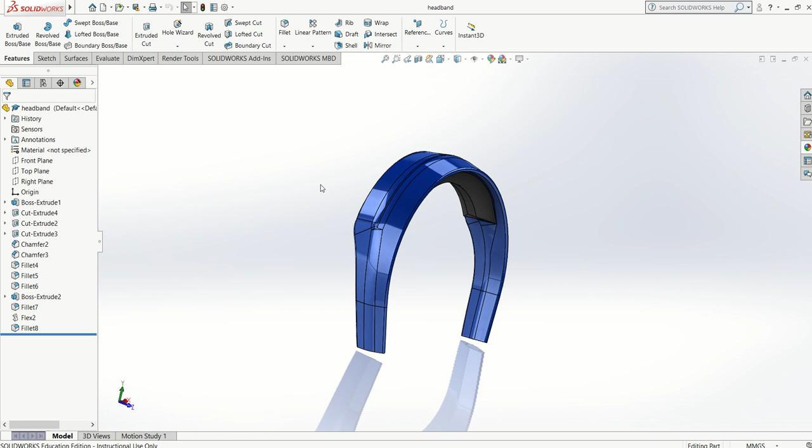So what I'm going to do is go up here to File, Make Assembly from Part. As you can see, these are my open documents here. So headband is what I want, so I'll just click the green tick and that'll drop into the center.

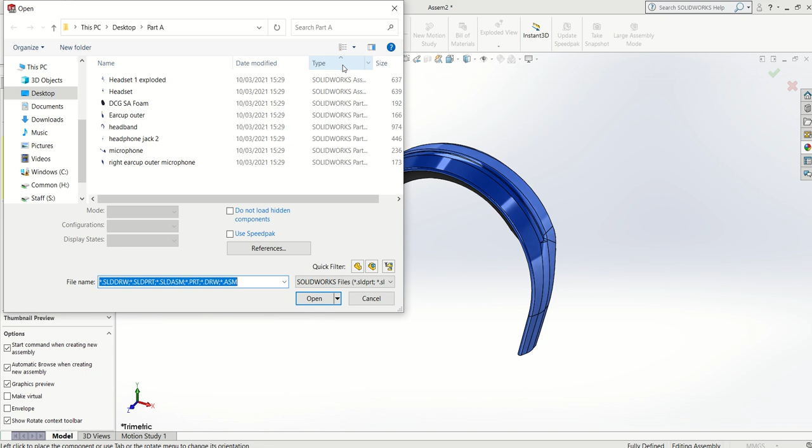Now I want to enter in some other components, so I go to Insert Component, Browse, and I have all of my part files here. So I will bring in the right ear, place it there. I can do it again.

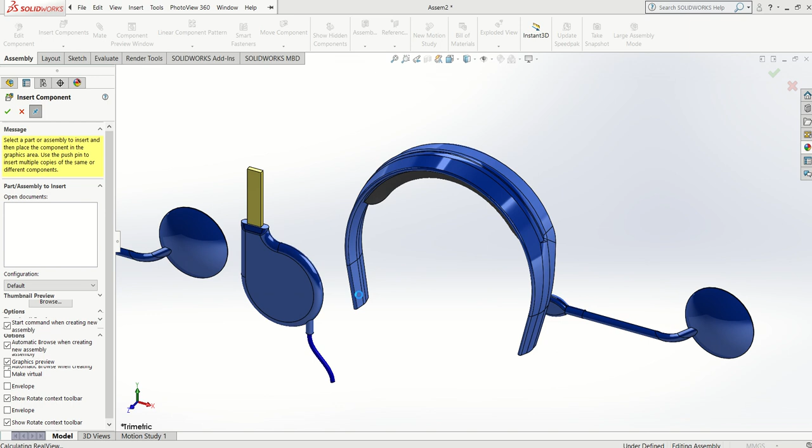Now if you don't want to keep hitting Insert Components, you can just pin that down there. Go to Browse, go to your next component, which is the microphone. Bring that in, browse, get the next bit, headphone jack. Okay, next component then would be the headband, which I already have, ear cup component.

And the DCG SA foam. Now I'm going to need two of them, so I'll click twice and I'm finished with all of them. So there they are, all of them.

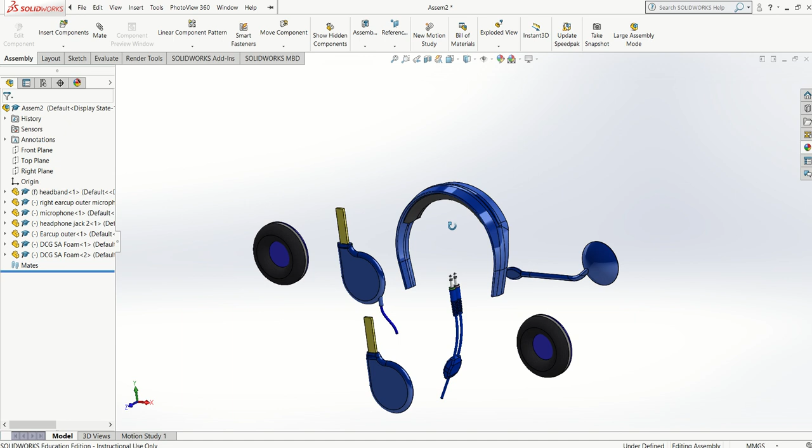Now what I'm going to do is I am going to connect them all together. So I'll go up here to Mate, and what I'll do is I'll start connecting them together. So I will select this surface here, and that surface is going to go on the left-hand side inside here.

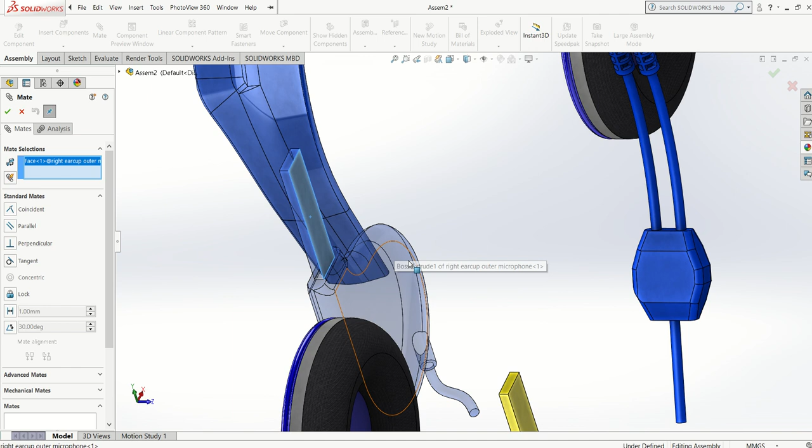Now I have to make sure that the orientation of it, that this bit that is sticking out here is towards the back end, which is here. So that means that that is going to go to the inside in there. So I'll select that surface there, and you can see that it's moved into position like so.

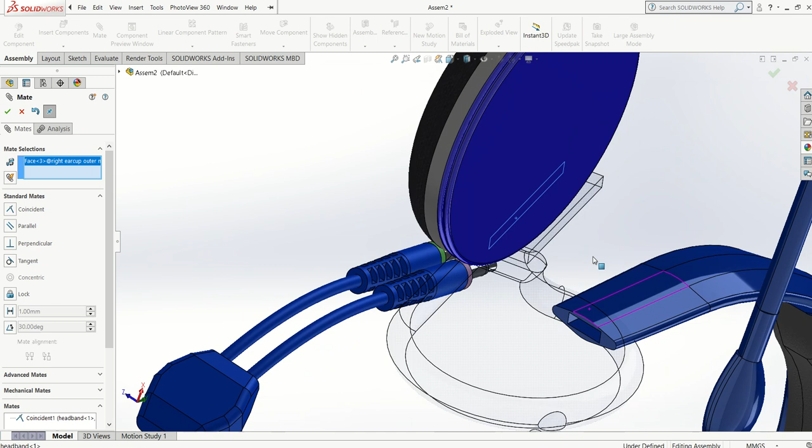Now the next area is going to be this surface. It's going to touch against that surface. Okay, so as you can see then that they have moved into position there. So I'll hit the green tick.

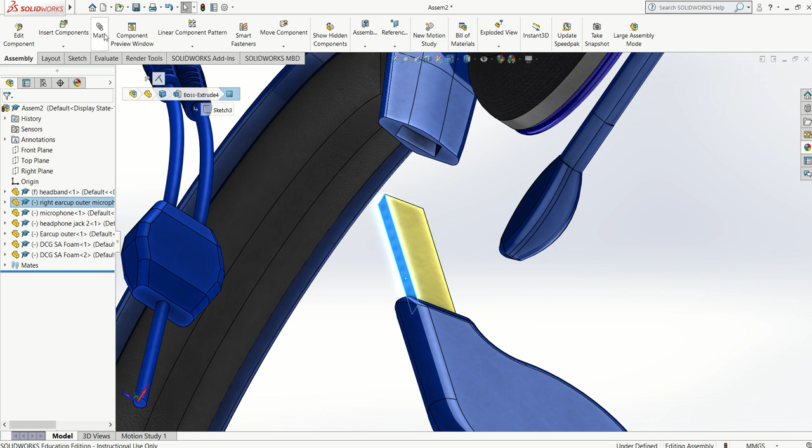If you select too many surfaces, obviously it's going to throw up an error. So we'll just do that again. So click that surface there, we'll click that surface there. I'm not in the mate, I need to be in the mate for this to happen. So select one surface and the other surface.

And now what we want to do for this headset is we want to limit it. Okay, so we want it to be a bit of a functional component, so we want it to insert in and out, but obviously we don't want it to go beyond like so, and we don't want it to come out like so. So what we're going to do is we're going to enter in an advanced mate into this.

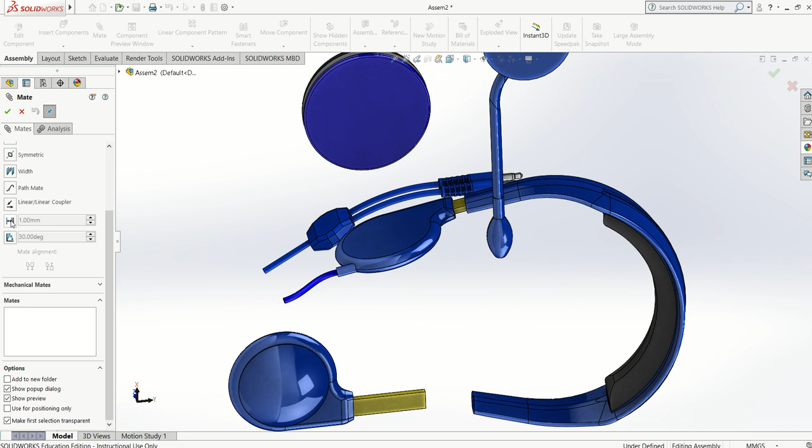So if I go here to mate and I open up the advanced section, this is my distance mate. Okay, so I can set a distance between certain surfaces, so that there, top surface, and that surface there. I could set to 0 if I wanted to do an ordinary mate, a standard mate, but I'm in advanced mates here.

So this is going to be my maximum component. So I'm going to just say 8mm is my maximum that I want to expand it, and I want it to be 0mm, which will be the two surfaces touching. So as you can see, if I hit the green tick now, that will go to 8mm and to 0.

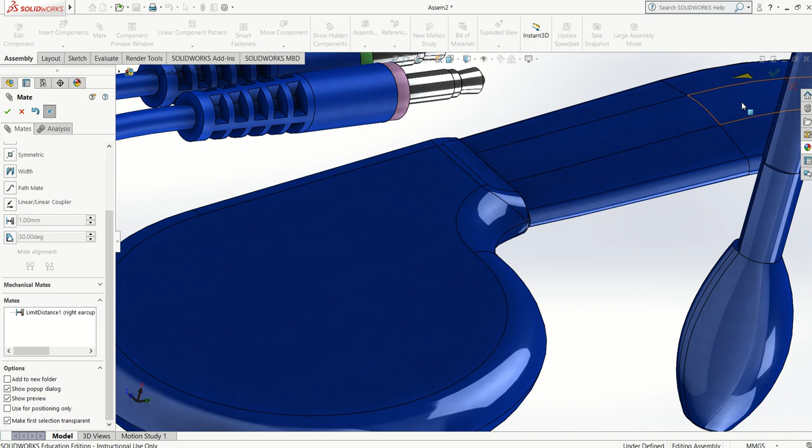Now if I notice if I go to 0, it's sticking up there a little bit, so I'm just going to open it up there and I'm going to edit that mate. So I'll go here to my limit distance, I'll right click, edit feature, and I'll change that to, instead I'll actually change that to 10 maybe, 12, and I'll change the minimum to 2.

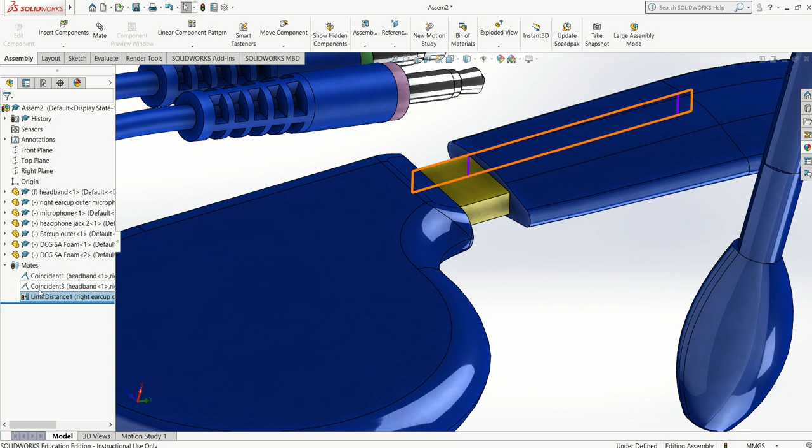Hit the green tick, hit it again, the rebuild button. So now there shouldn't be any issues. As you can see, there's a 2mm gap there, and then that's my 10 or 12mm gap there. Okay, so that's one component.

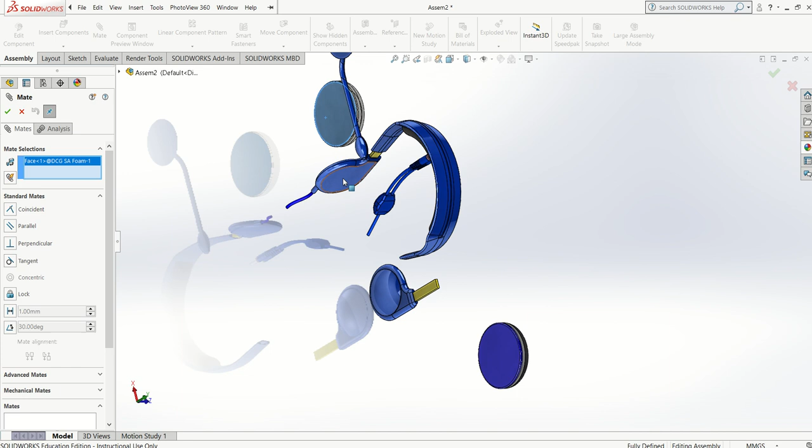The next then is I'm going to stick the padding to the inside. So I'm going to go to Mate, select the surface there and select that surface. Now, as you can see, the two surfaces are in conjunction with each other, but it's the wrong way around. I want the padding on this side. So what I can do is I can just go down here to Mate Alignment and hit the anti-aligned, and that will flip it around.

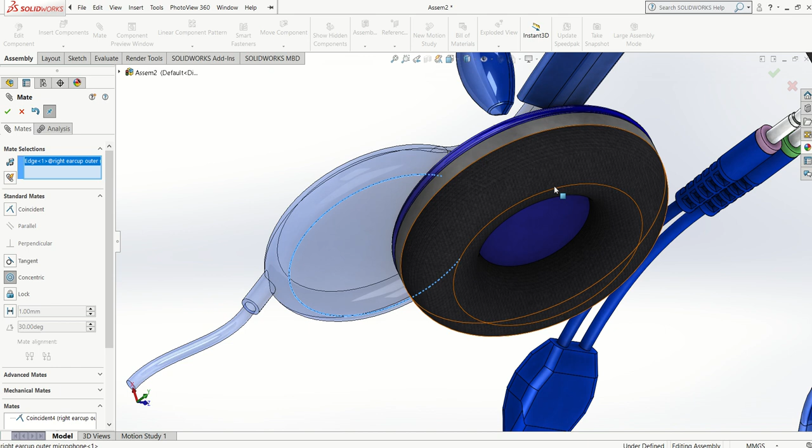Okay, the other function here is because I have circles involved, I can use my concentric circle tab. So if I hit that arc and any other cylindrical or circular component, they will share the same center point, and that means that that's perfectly centered on that. That would be my green tick. So I'm done with that one, and I can continue on like so.

Other mates there. Generally, if you just click two surfaces, it will automatically select the quickest and correct component, but you can tweak it then afterwards if you want. Try to avoid using lock if you can. And again, tangent is for the likes of cylindrical components that'll be up against or touching flat surfaces or things like that, or circular components against flat surfaces. So that's how you assemble your mates.

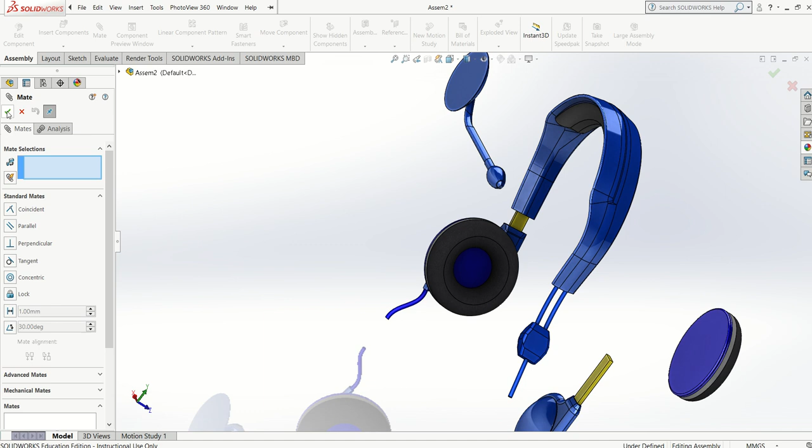Now what I also then suggest as well, if I was to open up one of my components, let's just say the ear cup here, I would always change the appearance in the part, and I'll show you why now in a second.

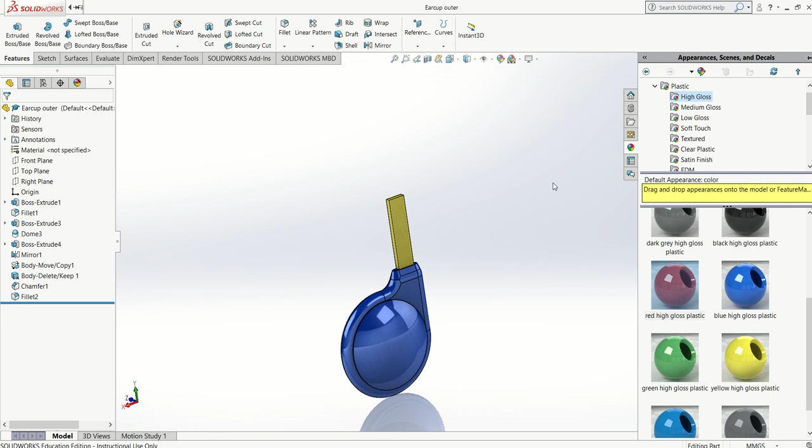So if I take green, so I don't like the blue, again this is actually a black headset, completely black, but the colors are entered to just show a bit of presentation, a bit of color on the page. And again, you must note that when you're presenting your item. But if we take the green and we drop that onto the surface there, and I want that onto the body, so everything that was blue is now green.

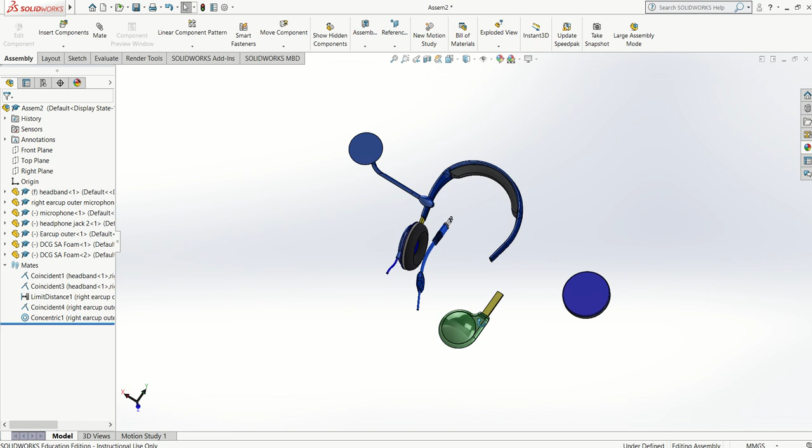Okay, and then if I open up my assembly again here, you will notice that the component in the assembly is automatically turned green. So again, if we do that for all your components, the assembly would automatically change. So I advise changing the appearance in all parts. Do not change the appearance in the assembly. It will automatically happen in here. Okay, so that's how you create your assembly files.